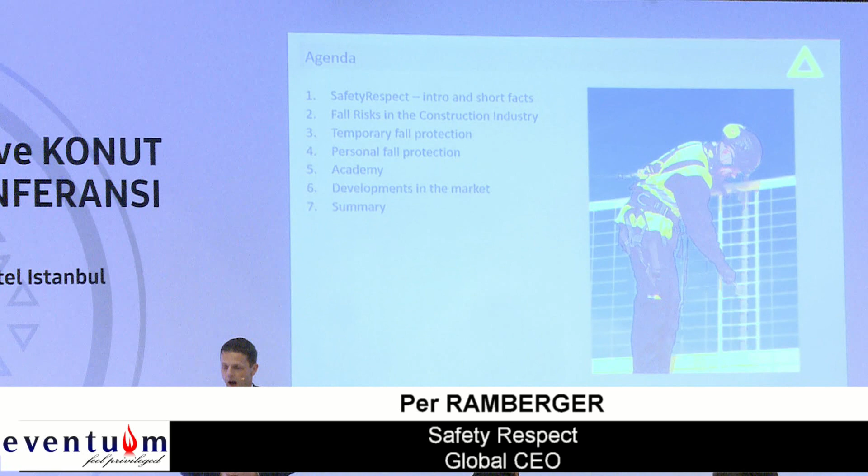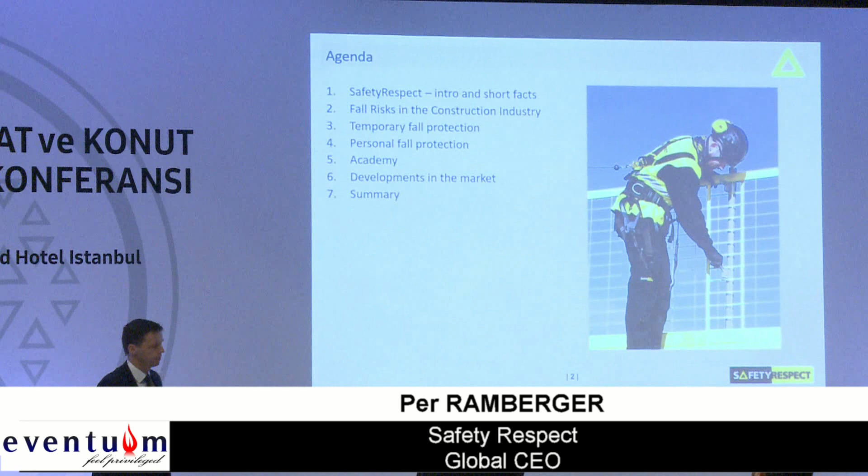I have a quite short agenda. I will go through a short introduction of Safety Respect. We will look at the risks in the construction business, how to handle them, and how to achieve improvements. We will look at what we can offer in fall protection, both temporary and personal. We will look at academy, the training we can provide. We will do a small check of the developments in the market globally, not only Turkey. We will also do a summary of this. So let's continue.

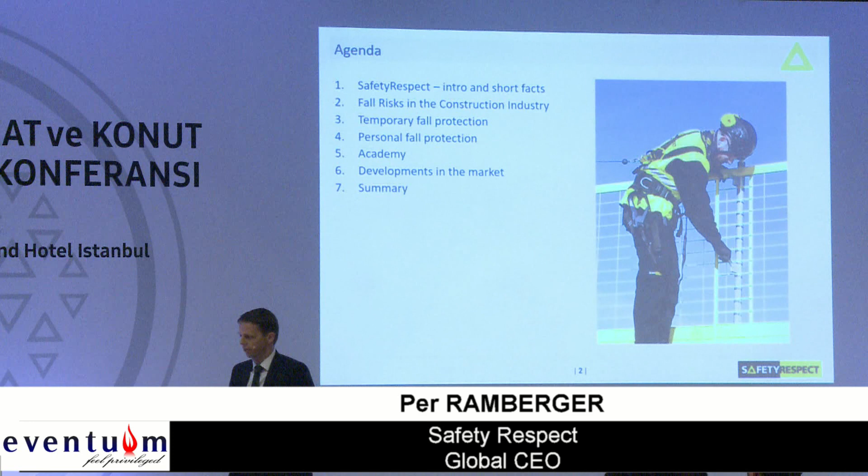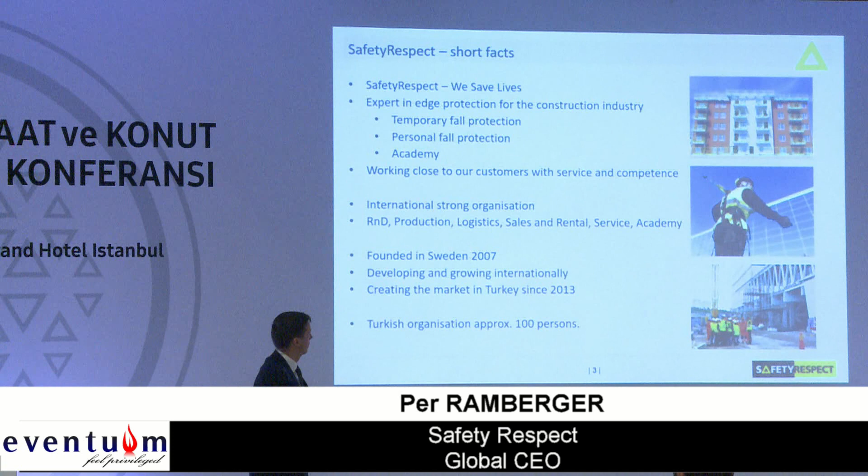Safety Respect, we save lives. We do that by being an expert in the construction business for edge protection. We have both the temporary fall protection, as you see, and the personal fall protection, which is the harnesses that you use for mounting the temporary systems. We also have an academy where we do the training.

Normally, we work very close to our customers and help them with service and training. By being close to our customers, we really can achieve an improvement in the market.

We're an internationally strong organization. We cover everything from research and development. We have our own production. We do the logistics, rental and sales. We have service and academy. So by being a quite small company, we handle everything that our customer needs.

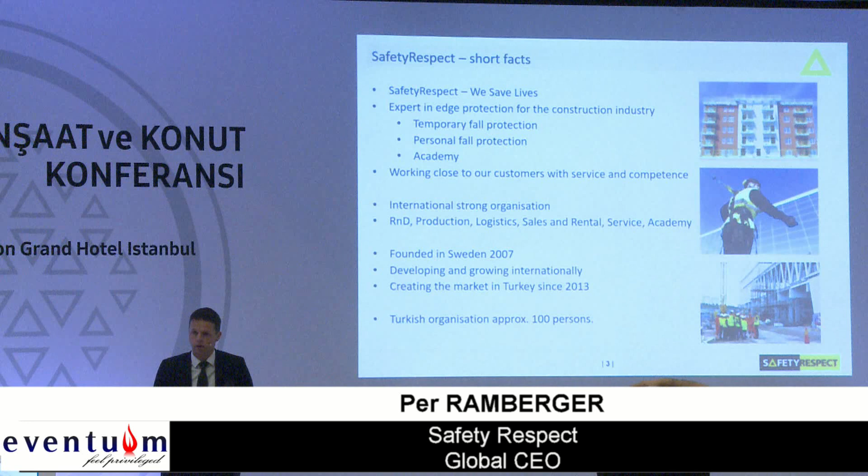The company itself is 13 years old. It was founded by me and an associate. We're growing rapidly international at the moment, and from 2013, Turkey has been a base for us. I will show you a little bit more about what we have done in Turkey. At the moment, we're approximately 100 persons in Turkey, so there is a good organization here.

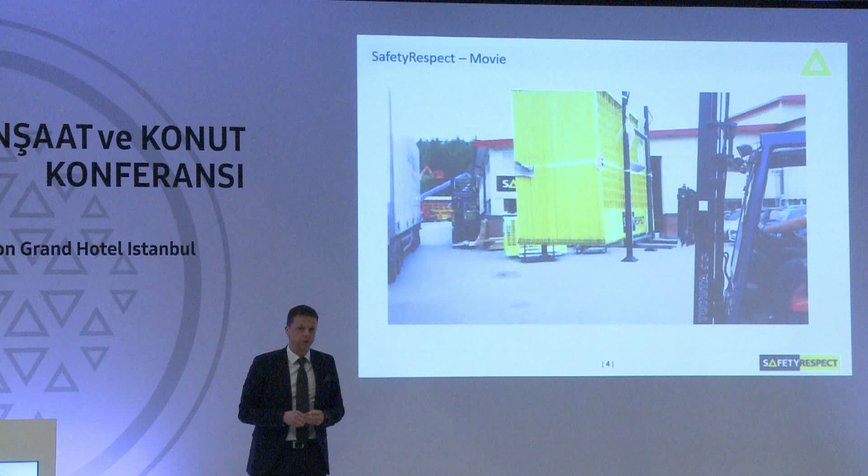A short movie showing what we do and how we handle our projects. We help our customers with risk assessments, and we do the edge protection analysis. When we come up with the best solution for our customer, we handle the logistics and help the customers with the right products at the right place. We give them the mounting instruction and handle the products at their construction site.

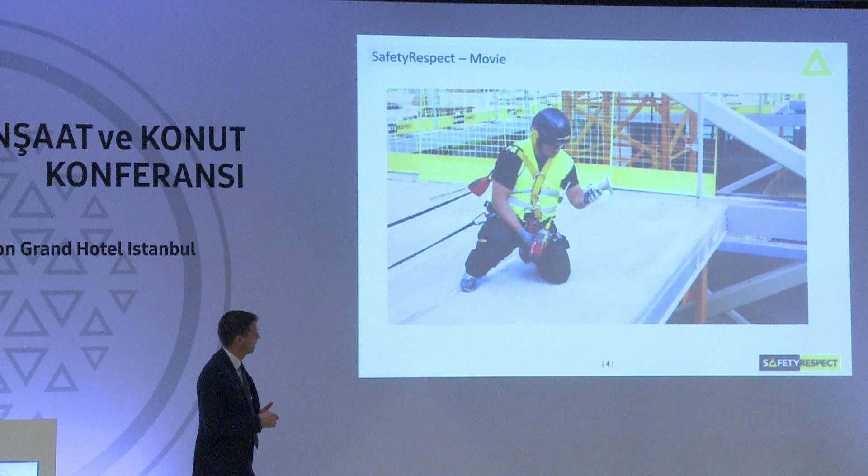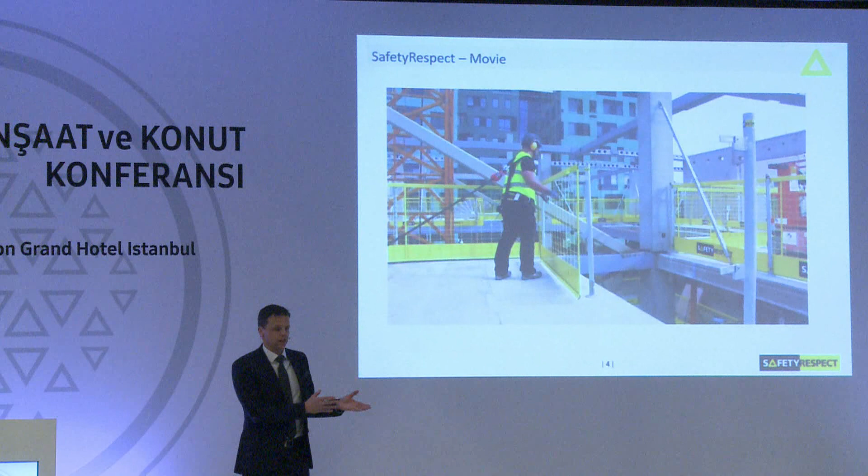What we see here now is a typical European system. We have different systems depending on where in the world we operate. Here in Turkey, we have a system designed for Turkey, and it operates very well here. And of course, we have a large span of different products.

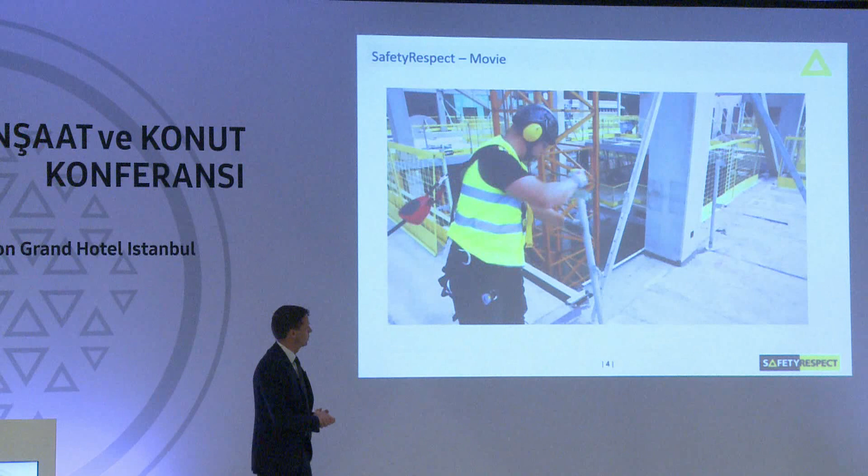Here we see how it's operated, very simple to use. You handle it with your gloves on. You can do it standing up. It's very versatile and very simple to use. It's mounted by anyone who got the training. You can do very simple adjustments of the systems. You can lift it up to do the concrete pouring, and it's very simple to handle for anyone.

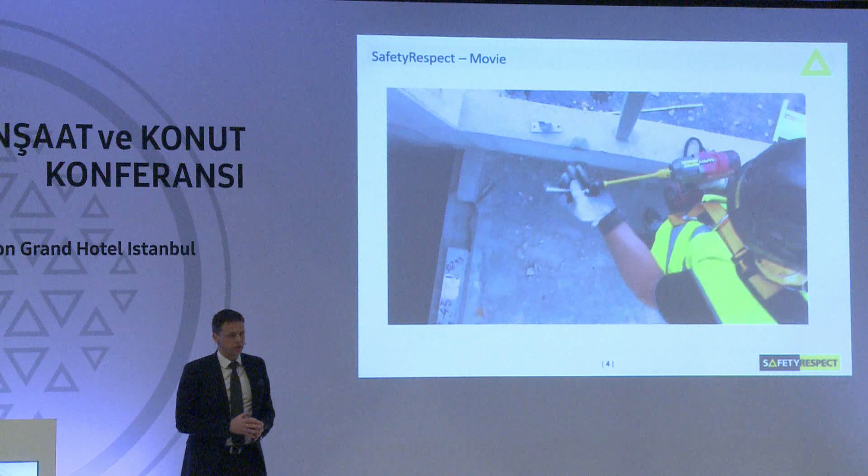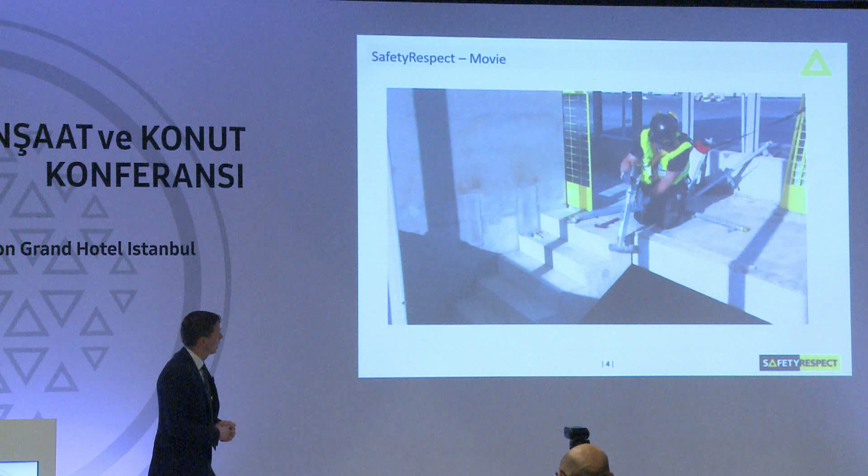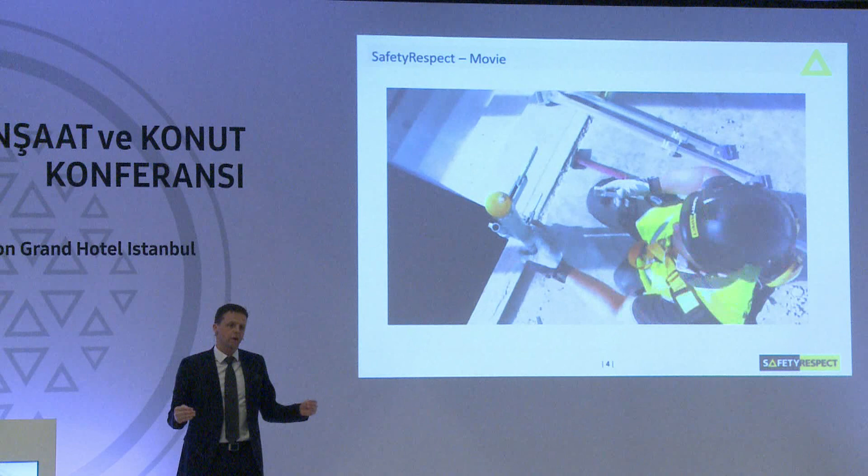Of course, we handle all the situations in the construction business at site. We can close off all the edges. We can handle the lift shafts, which you see in the picture right now. From the edge, you normally come up to a staircase, and of course you need to handle the stairs. It's very important - it's very common that the customer normally only looks at the edge. But you have a lot of edges inside the house as well, like staircases, elevator shafts, openings.

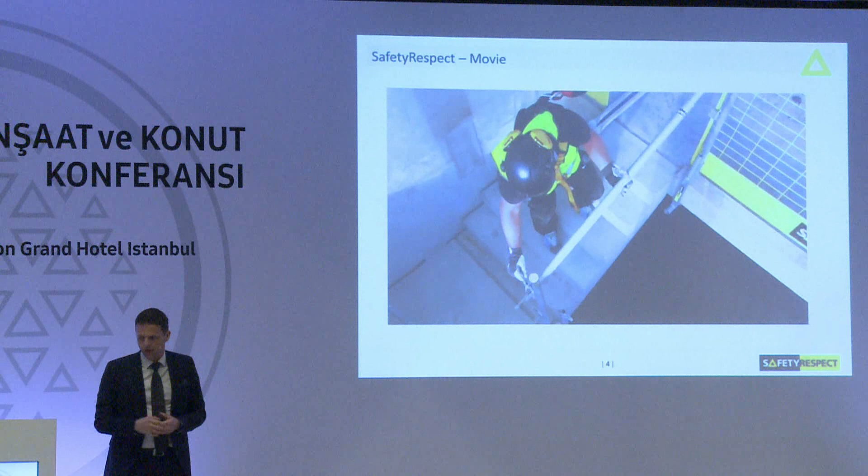What you see here is that we cover the staircase with a very flexible solution with our link bars. And now you see a complete solution with the staircase connected to the edge protection barriers.

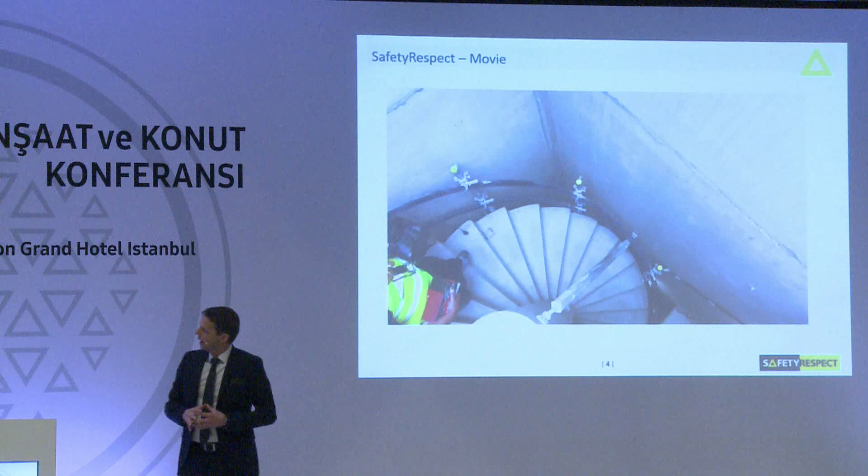Once we have done that, we do the safety check. We have a digital checklist where we confirm that we have set up everything. We click OK, and then we send a report to ourselves and to our customer saying that everything is checked and operates properly. And then we have a nice yellow construction site. So that is basically what we deliver to the market.

We've been in Turkey since 2013, and we have production for the international market here in Turkey as well. We believe in Turkey as a strong market, both for our production and for the construction industry.

After that, everything started going very well, and we increased the speed. Now the project looks like that - huge projects with a lot of yellow barriers. We're very proud of having achieved this in Turkey. Now we have a lot of competitors, but we feel that we have been driving and building this market in Turkey.

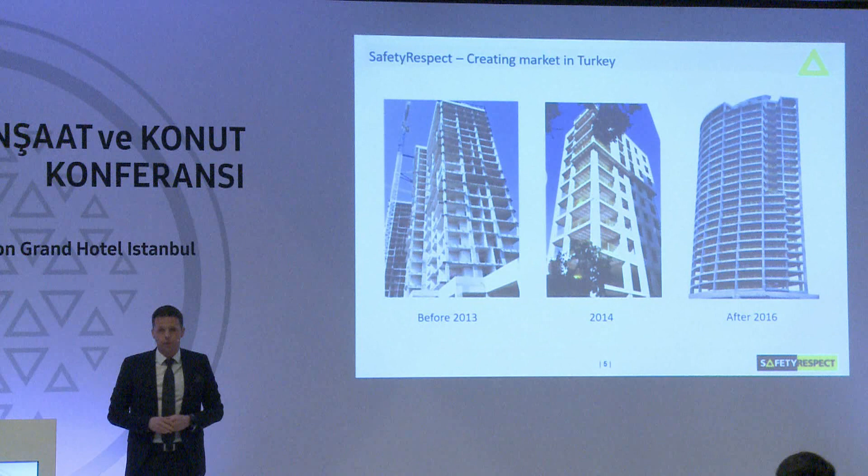If we go into risk management and the risks of handling the edges, everything comes from attitude and mindset, from the management down to the worker. Attitude and mindset is the most critical thing to have in place in the organization. Then, of course, the competence and education - you can get that if you have the right mindset. If you have the right education, you can get the right products. So it's linked together that way.

Globally, one third of the accidents in the construction business is from falling. It's by far the biggest accident cause. Half of the deaths in the construction business come from falling. This is a big effect on the workers, and these are global numbers - it's very similar everywhere in the world.

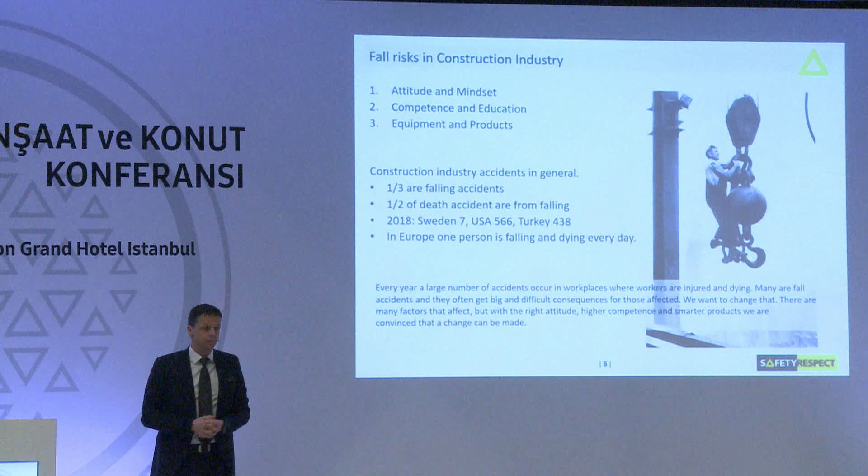If we look at total numbers, in Sweden we have 7 deaths - we are 10 million people in Sweden, and we have 7 deaths from falling in construction. USA, a big market for us as well, has 566. Turkey's number is 438, in 2018 - that's the official number, and of course we can discuss that. In Europe, every day 1 person is falling and dying. I'm sure you understand this is a big problem, and it can be handled with the right way of work.

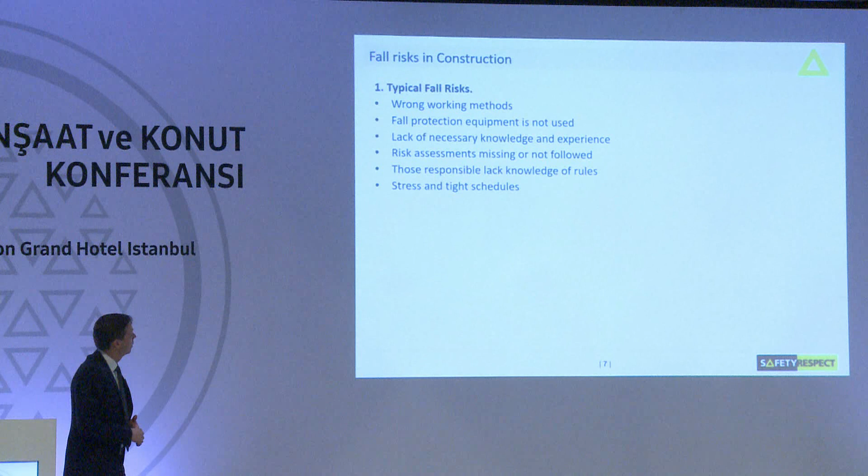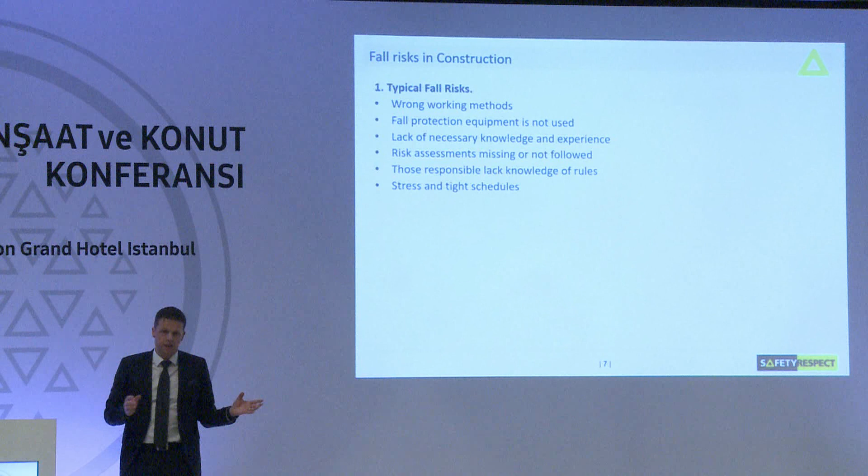Typical fall risks: wrong working methods. You don't use the edge protection that's required. You don't have the knowledge. You don't do the risk assessments - that's very important to do and follow. The responsible persons lack knowledge. And of course, stress and tight schedules on projects is very important as well.

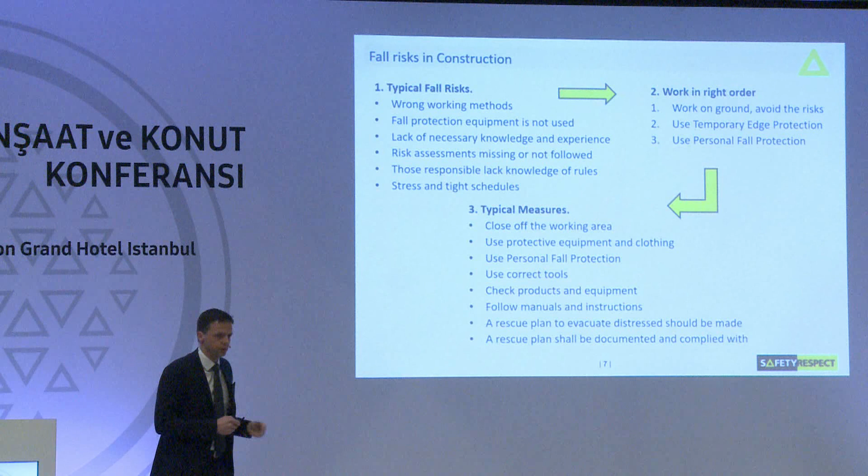This is quite easy to handle. If you work in the right way, avoid the risk by working on the ground - that's most important. The next step is to use proper edge protection. If you can't use the right edge protection, use personal fall protection. That's a very simple mindset of using the systems. And of course, then you have a lot of different measures to handle the risks.

We will see a video where you will see some of this coming up now, and that will make it a little bit clearer. There is a speaker in this as well.

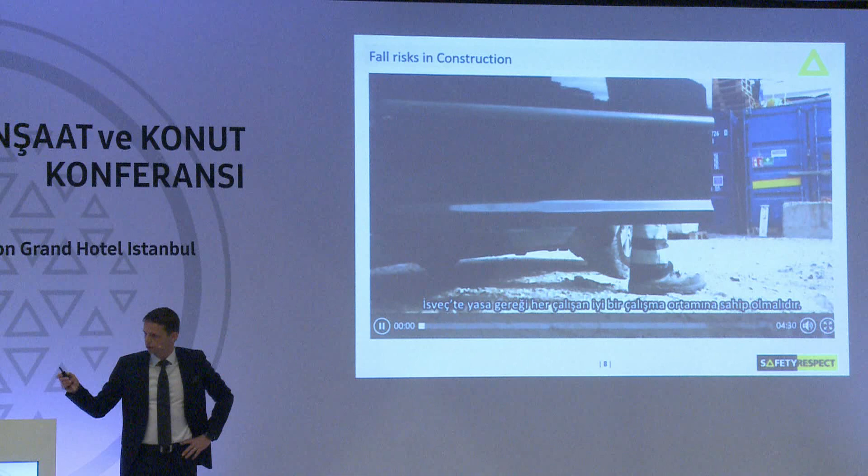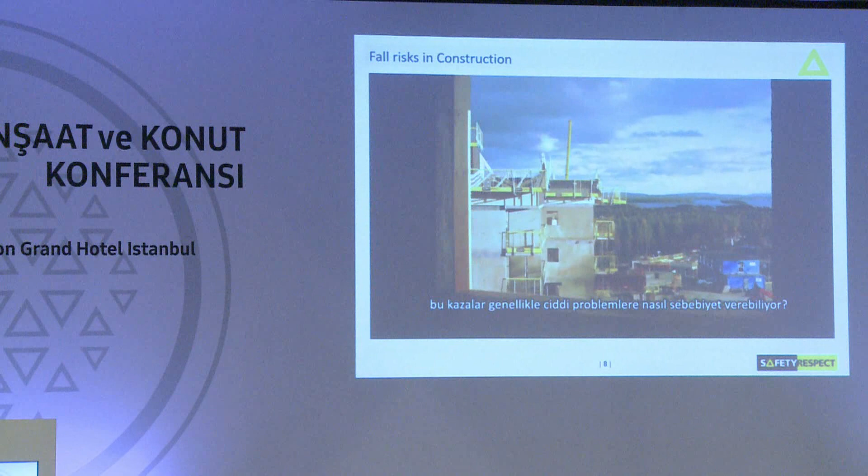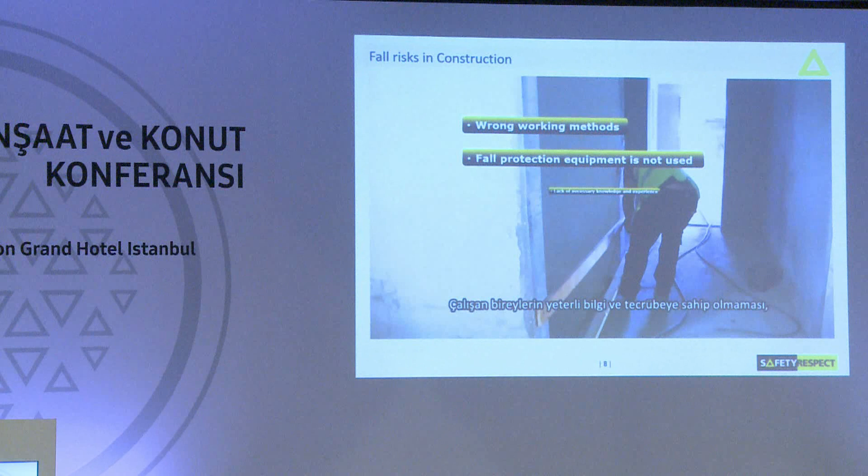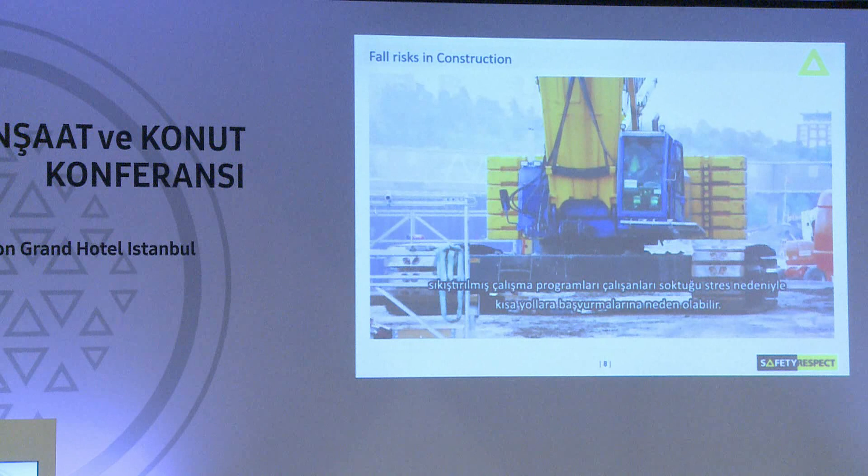In Sweden, everyone, by law, has the right to a good working environment. The work should be organized so that it can be carried out safely. The occurrence of many accidents every year is not acceptable. How can it be that there are so many falling accidents, and that they often have such serious consequences? There are, of course, a variety of reasons, but some of the main ones are: the wrong working methods are used, for example working at height instead of on the ground; fall protection equipment is not being used, or is used incorrectly; those involved lack necessary knowledge and experience; lack of risk assessments, or the results of risk assessments are not complied with; drafters, supervisors, and managers lack knowledge of the rules that apply. But accidents are also caused by pressured schedules that lead to stress, causing those involved to take shortcuts.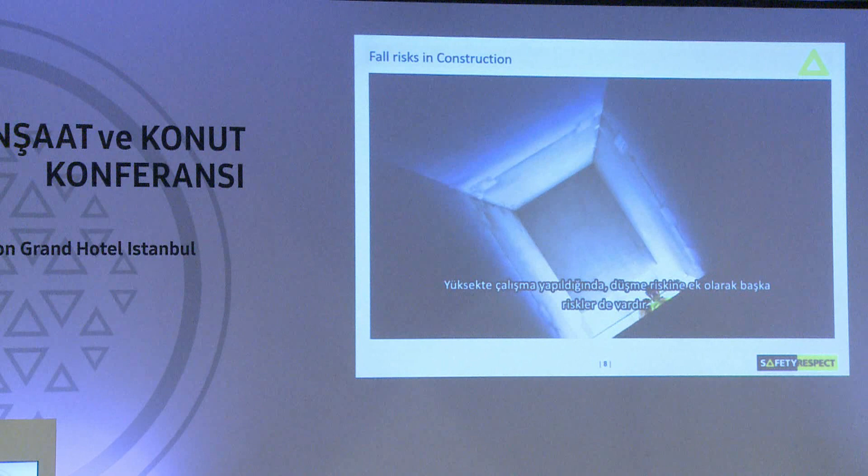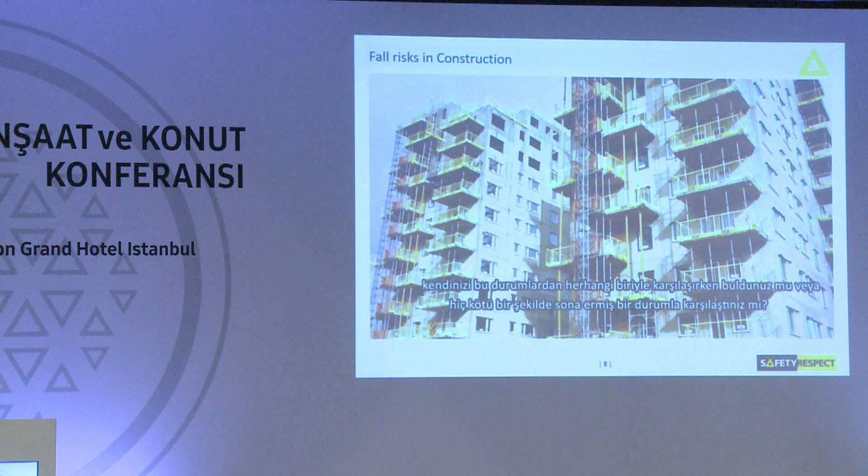When work is carried out at heights, there are also other risks in addition to the falling risk. There's a risk of dropping tools or components. There are also clamping risks and risk of damaging sight and hearing. Think a little about this based on your own experience. Do you recognize yourself in any of these, or have you ever been involved in a situation which could have ended badly?

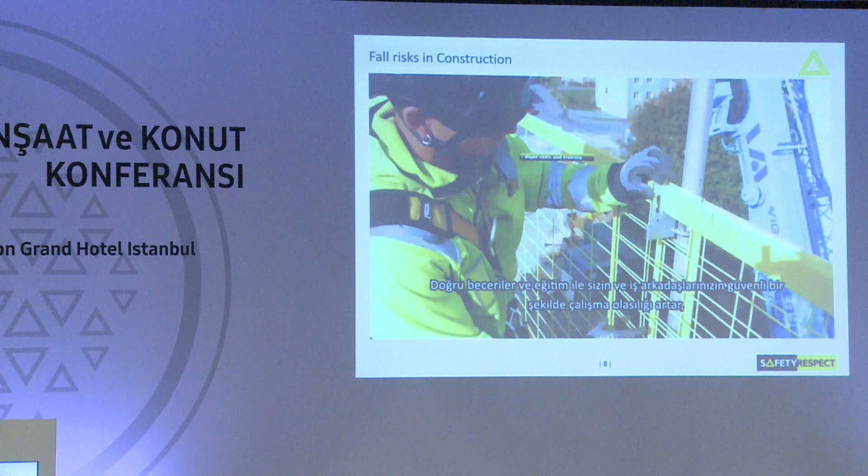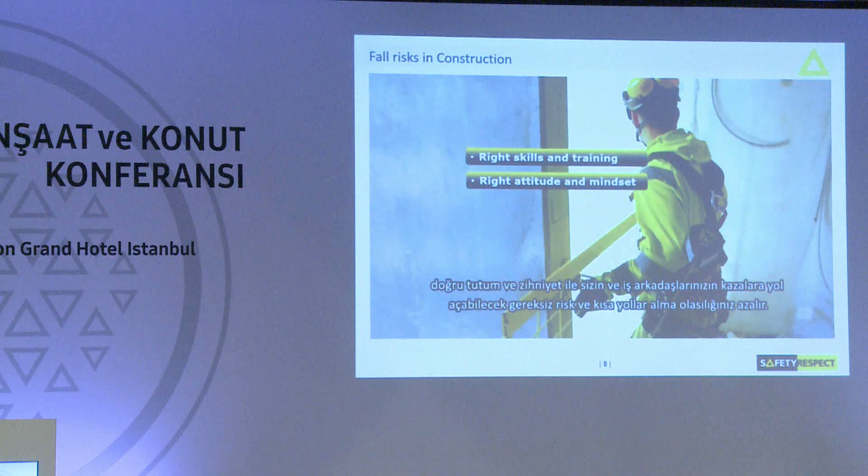What can we do to avoid accidental falls? With the right skills and training, the probability increases that you and your colleagues work safely. With the right attitude and mindset, the likelihood reduces that you and your colleagues will take unnecessary risks and shortcuts, which can lead to accidents. By using the right fall protection, you and your colleagues get good protection and can work in a safe manner.

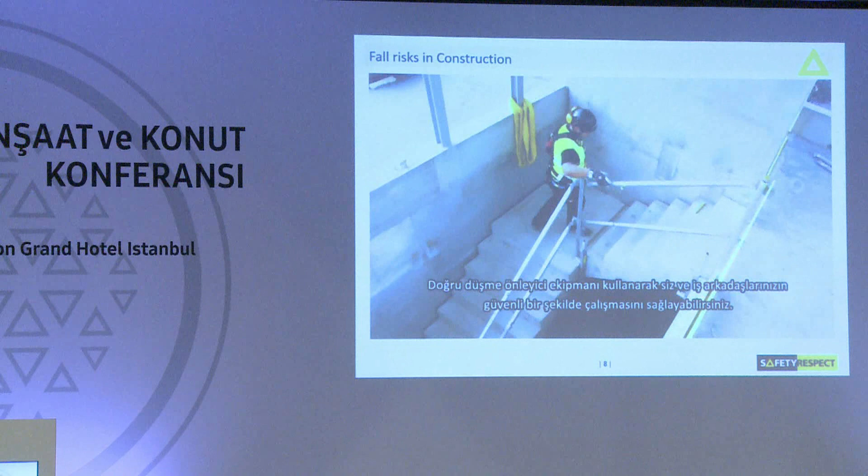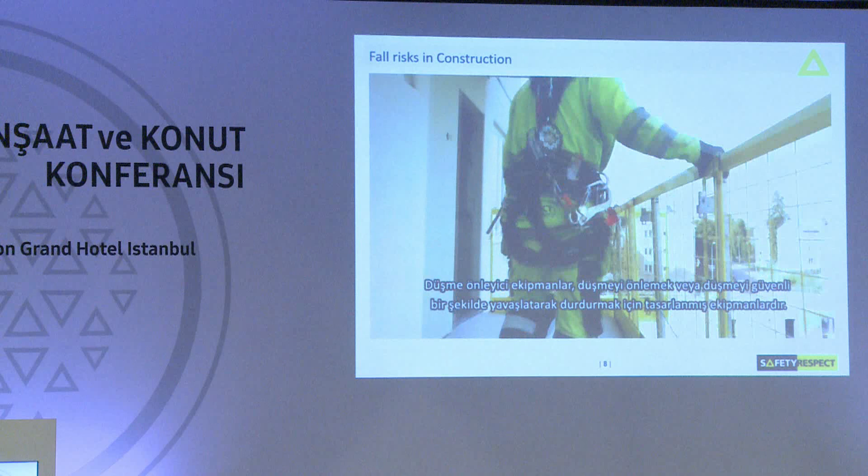Fall protection is equipment that is intended to prevent a fall, or if a fall occurs, safely slow down and stop the fall. A risk analysis must be carried out before commencing work where a falling risk is present.

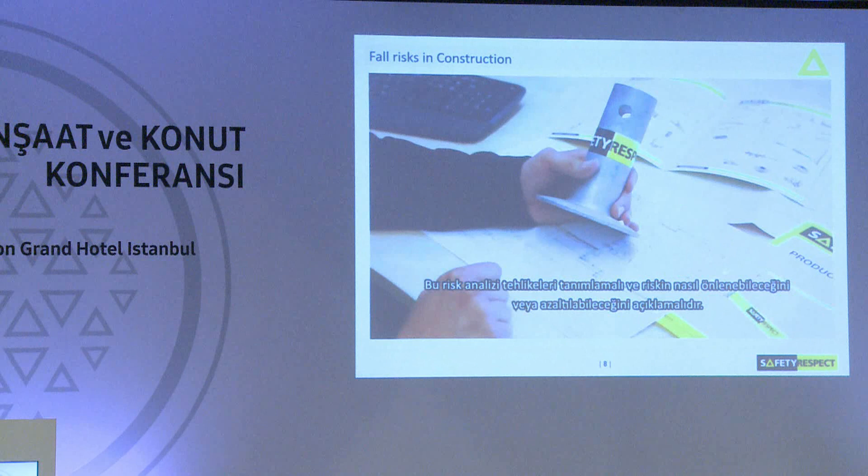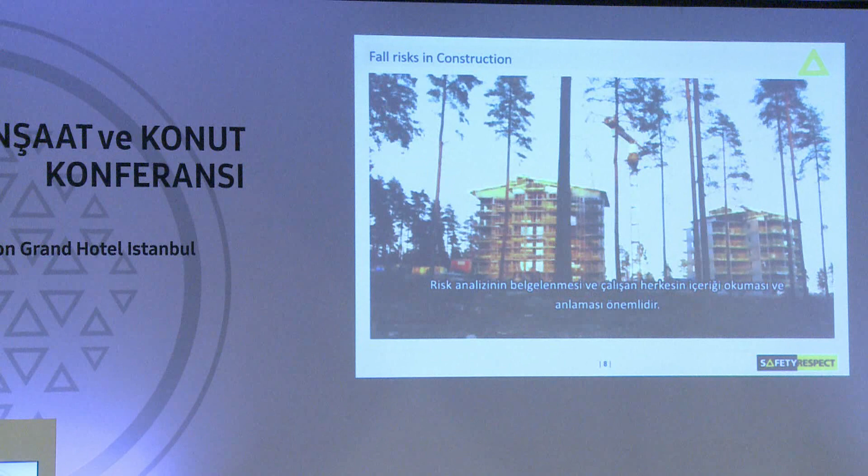The risk analysis shall describe the hazards and explain how the risks can be avoided or reduced. It is important that the risk analysis is documented and that everyone involved in the installation has read and understood the content. In order to reduce the occurrence of accidents, it is important to work in the right order.

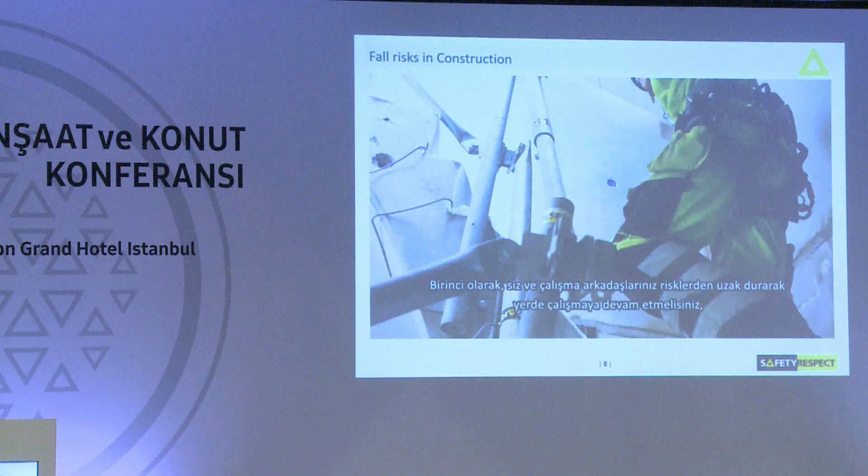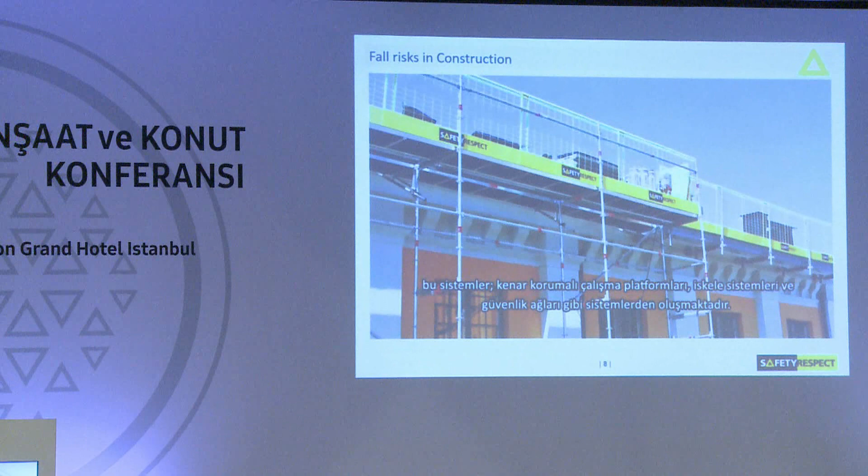Firstly, you and your colleagues should avoid risks by working on the ground. Secondly, if the work must be done at height, you should use collective fall protection such as edge protection, work platforms, working cages, scaffolding, and safety nets. As a last alternative, when there is no possibility of using collective fall protection, you must use personal fall protection.

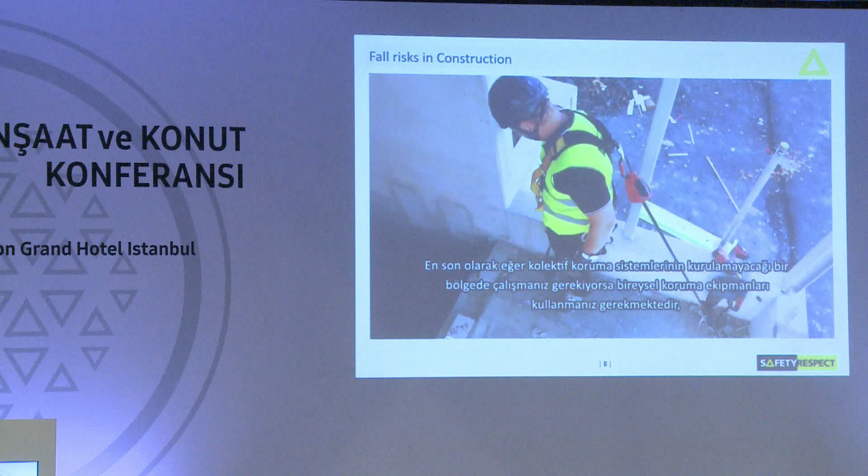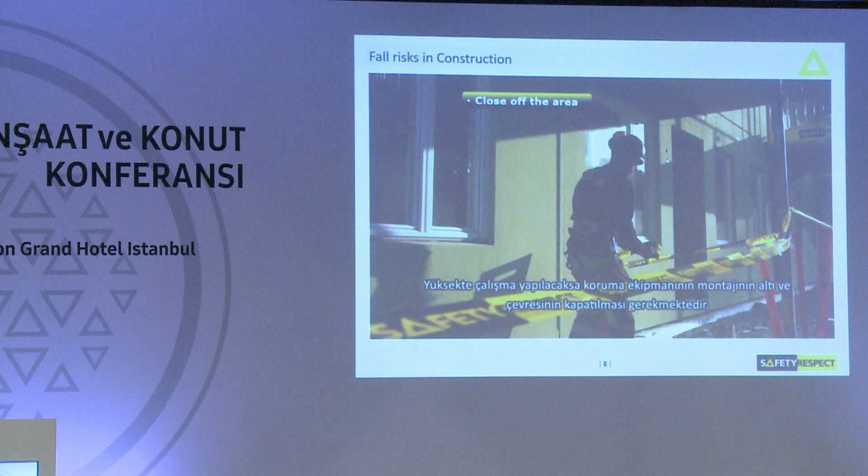There are also some comprehensive measures, which it is important that you and your colleagues know and follow. Close off the area underneath and around the mounting location so that unauthorized access is prevented. Use the protective equipment and work clothing provided by the employer.

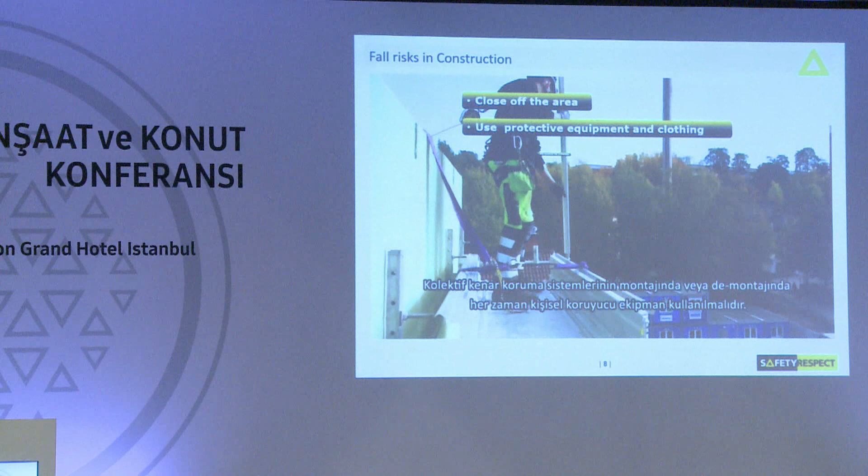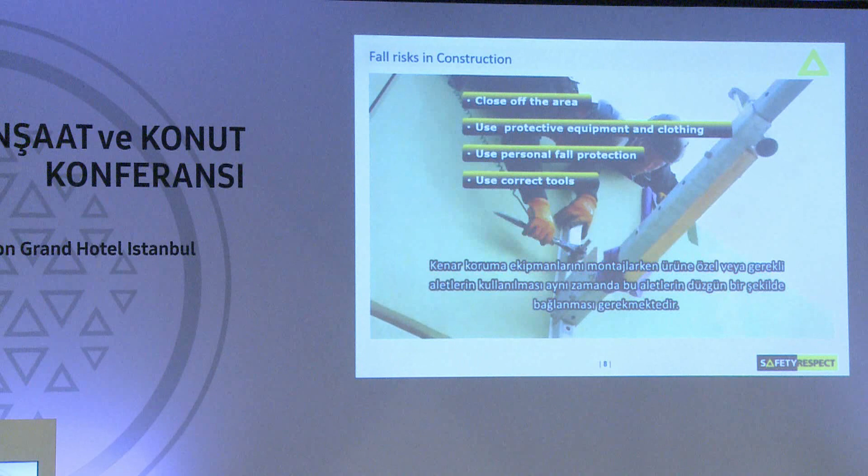Always use personal fall protection when assembling and dismantling collective fall protection. Use the tools intended for the installation and secure tools using a leash. Always check products and equipment before using them. Do not use products or equipment that are damaged. This can affect safety.

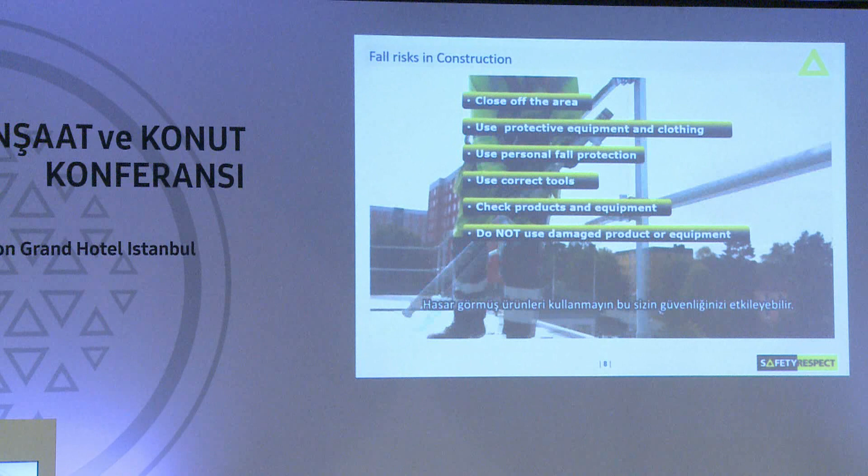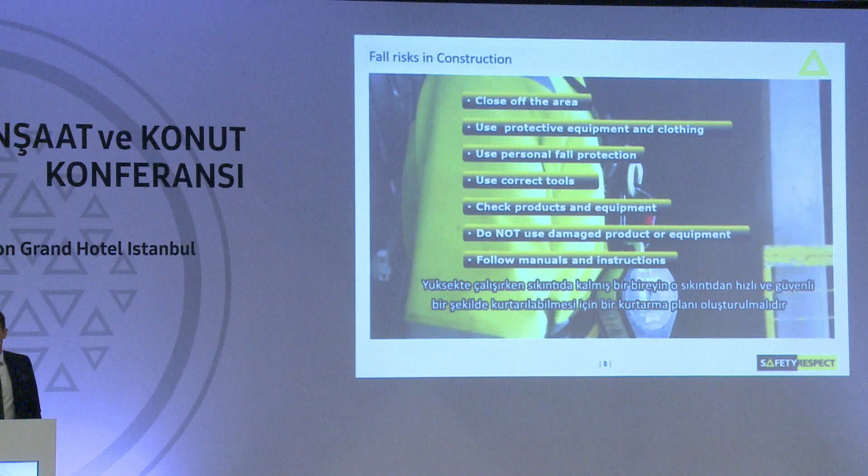Follow manuals and instructions. When work is done at heights or in an environment with falling risks, there should be a rescue plan that describes how a distressed person should be taken down. The rescue plan shall be documented and known among all those involved in the assembly.

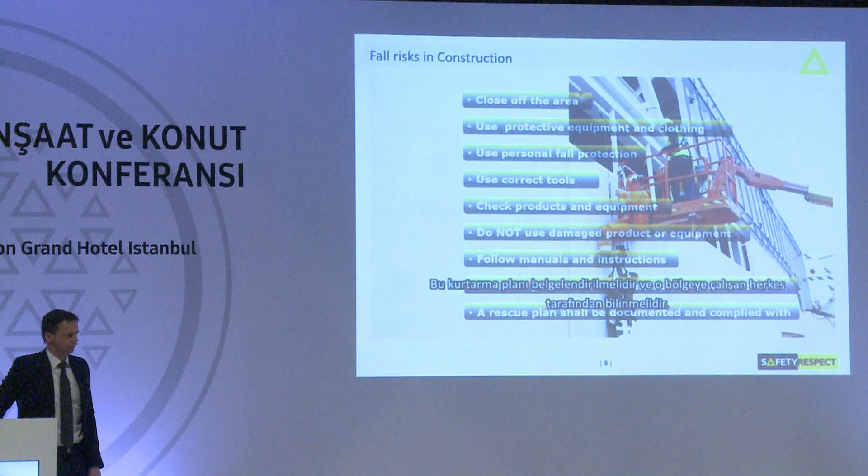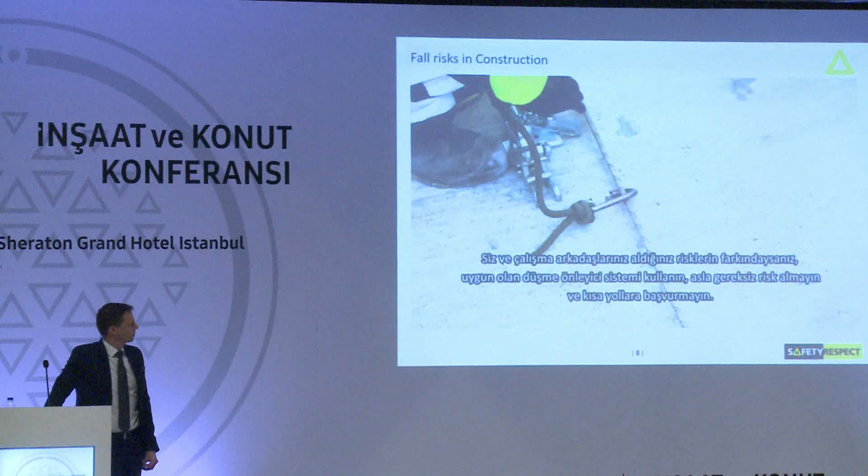If you and your colleagues are aware of the risks, use the appropriate fall protection correctly and never take unnecessary risks or shortcuts, work can be done safely, regardless of the height at which the work is performed.

Okay, I know I'm almost up on time here, but I will try to conclude this quite quick now. As I said, edge protection systems, that's very important to use. We have the different systems for the different solutions. And of course, we have the capacity to deliver big volumes, and we have the knowledge to go from the CAD systems and design process to the real world.

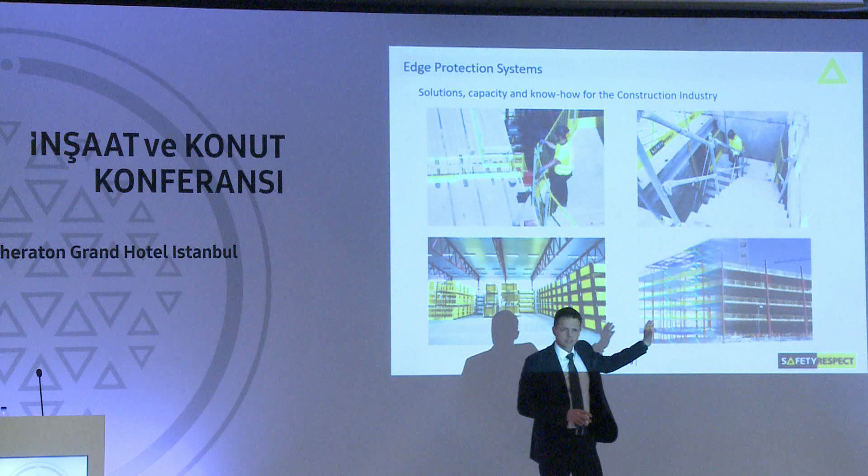And it's very important to understand the use of it. The proper edge protection should be used, and then you handle it with the personal systems. This definitely requires training, and then you need an academy. An academy for handling these products is very important to have this package in total.

What we see globally now is laws and occupational health developing very quickly. We see big political pressure to get these accident rates down, and it's happening everywhere in the world. We in Sweden have very high penalties at the moment, and I know that's the case here in Turkey as well, for if you don't comply with the rules.

Norms and product directives are developing very quickly. Actually, you here in Turkey now have come to the European norm, and you took it a little bit further. So you're the best in the world at the moment with the TSE standard. The TSE, European norm, that is...

13374. You're at the top at the moment because you have taken it a little bit further, and you require third-party checking of the products. So we are very proud of being in Turkey for that reason, and we try to bring that to the other markets in the world. Canada and the US are very slow. We can definitely teach them a lot.